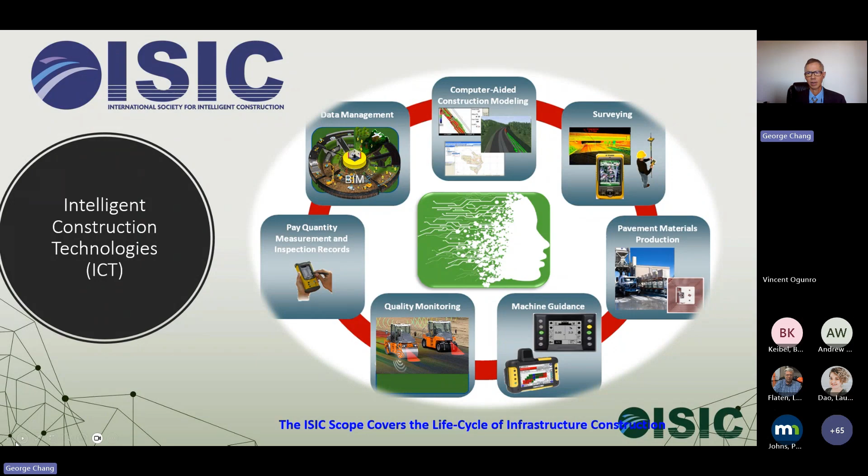So we started our inaugural conference back in 2016 in Portugal. And then we had our first conference in Minneapolis, with a lot of sponsorship from MnDOT, in 2017.

So we plan to do one international conference every other year. In 2019, we had our second conference in Beijing, China, and we postponed one year due to COVID. So in 2022, we had our third conference in Guimarães, Portugal. And this year, we have our fourth conference in Orlando, Florida.

We're going to talk about more planning in the future later on. In addition to the international conference, we also conducted supporting conferences such as the ISIC track. Normally it's a two-day track focused on intelligent construction at various conferences.

The last two we have done: in 2022, MTCNE in Minneapolis, we also had two days of the ISIC track focused on intelligent construction technology. You can see all the participants and speakers and coordinators for the 2022 ISIC track.

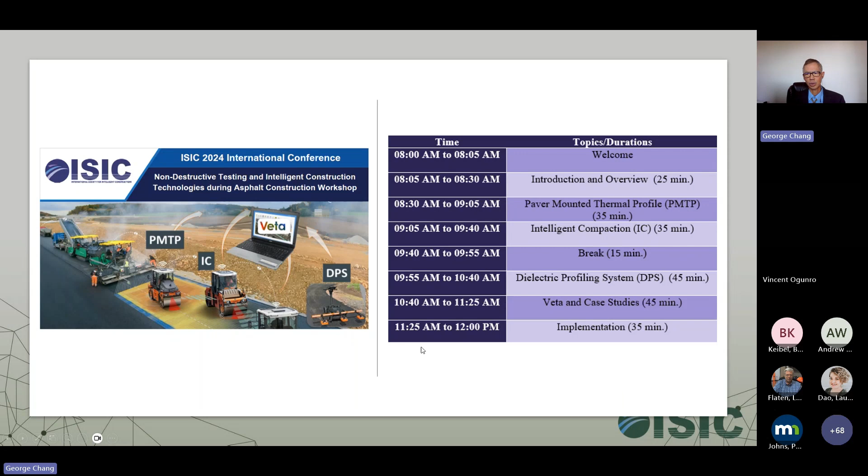You can see on the left here, PMTP, paver mounted thermal profiling, intelligent compaction, and DPS for measuring continuously the asphalt density using GPR technology, and then gluing all this technology data together using the Veta software. So this is a 4-hour workshop, really condensed to include all 4 technologies we're talking about. And not to mention, the last session of the workshop focused on implementation, which is a very crucial outcome for this workshop.

So I'm trying to pick one slide out of each session and presentation. It's going to be very hard. I'm trying to extract the 3-day conference into a 1-hour presentation. There's a lot of good content. At the end of this presentation, I'll show you how to download all the presentations from these wonderful workshops and technical sessions. So the one slide that's been brought up from the ICT workshop a lot, from the audience's feedback after the workshop, is the factors for premature pavement failure.

That was a survey by ASCE more than 12.5 years ago to find out the main causes in 2 categories for premature pavement failure. And you'd be surprised, or maybe not, to find out material failure is only 20%. The majority, 80%, is caused by workmanship. So this workshop's purpose is to use intelligent construction technology to overcome the 80% of workmanship issues that cause premature pavement failure.

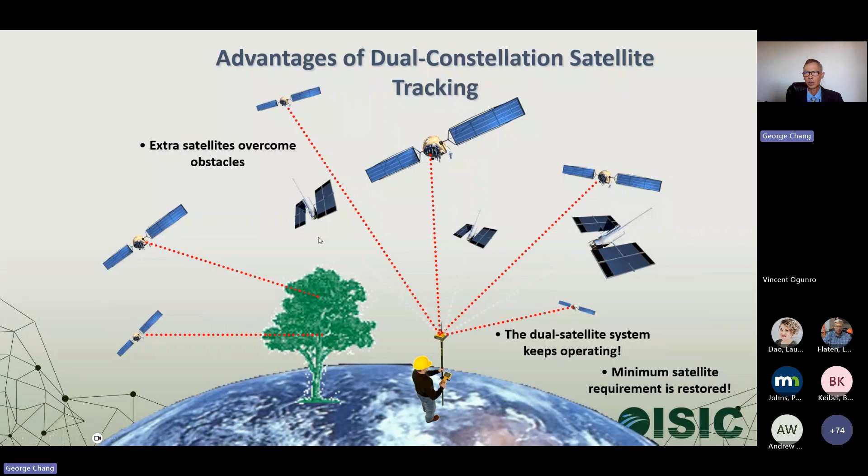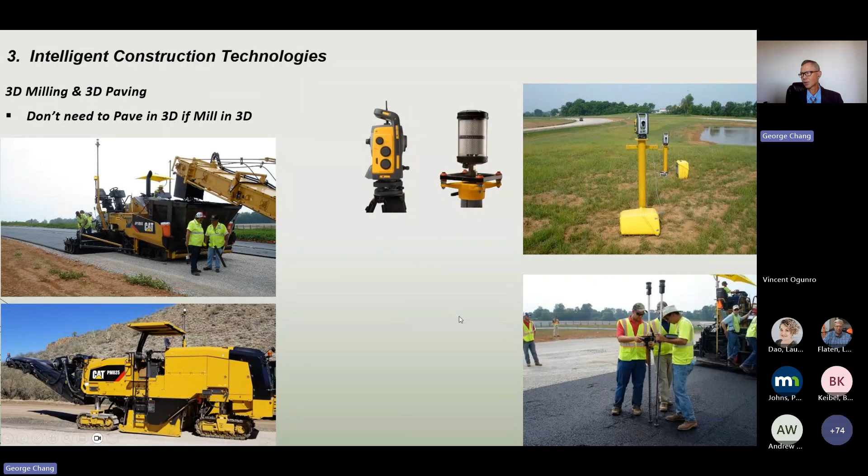Here it's showing paving work with 3D milling. If the milling uses three-dimensional control, you can pave using the paver in 2D. Here's all the positioning technology that can be combined and used by the milling machine as well as the paver to improve your paving quality. On the right-hand side, you can see the total station used to get high precision positioning, as well as a rover for a grade check after paving.

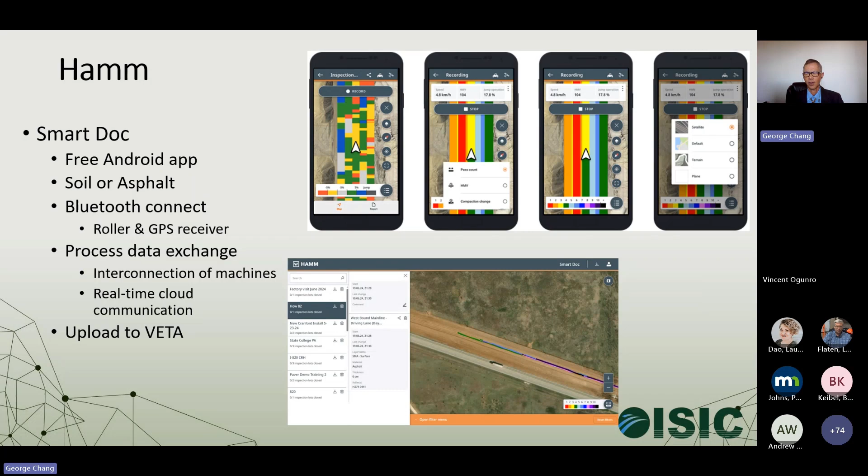Here's one slide from the compaction technology, from Tim's presentation. This is just an example to show what intelligent construction technology can do. Here it's showing the Smart Doc that can collect data from the intelligent compaction and provide information gathered from the technology, and finally you can import the data for management.

Here's one slide from EO's presentation. This is a wonderful presentation that shows the value of using GPR technology. In this case, you can see different sections with missing documentation that you can fill in using information from the GPR, so you can have more precise, accurate information for project scoping.

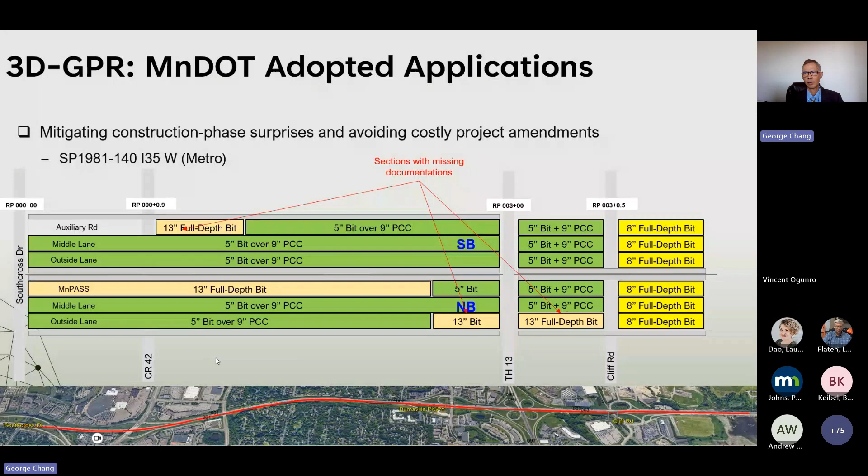It's just a wonderful application for this technology. For my last presentation, I presented the roadmap as well as the challenges and solutions for automation in construction. There's a lot of need for using this technology to overcome the shortage of skilled workers and also achieve higher quality work.

This includes mirroring the automation in autonomous vehicles, which have several levels of automation, starting with automation like controlling. I'll show some examples later, going through the intermediate step with semi-autonomy. That's one presentation in this conference, called supervised autonomy - it's a similar concept. And finally, to full autonomy technology.

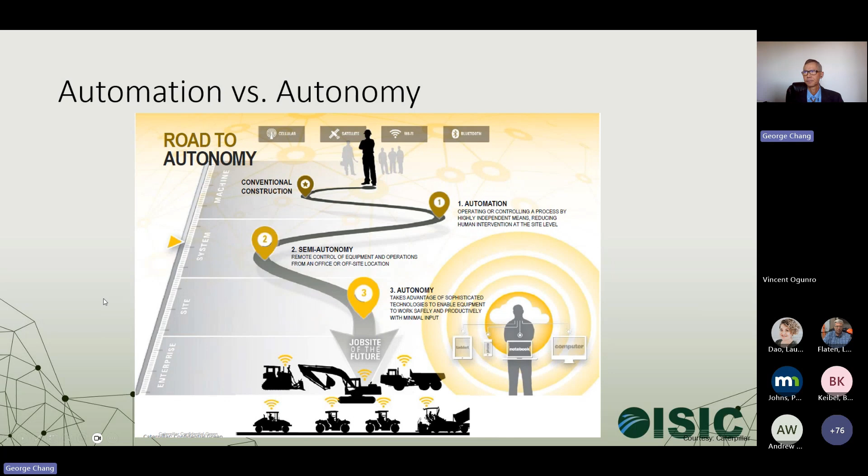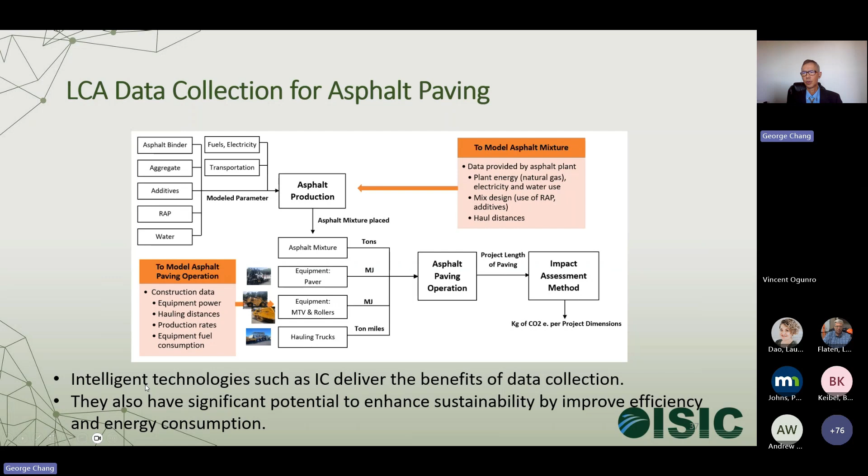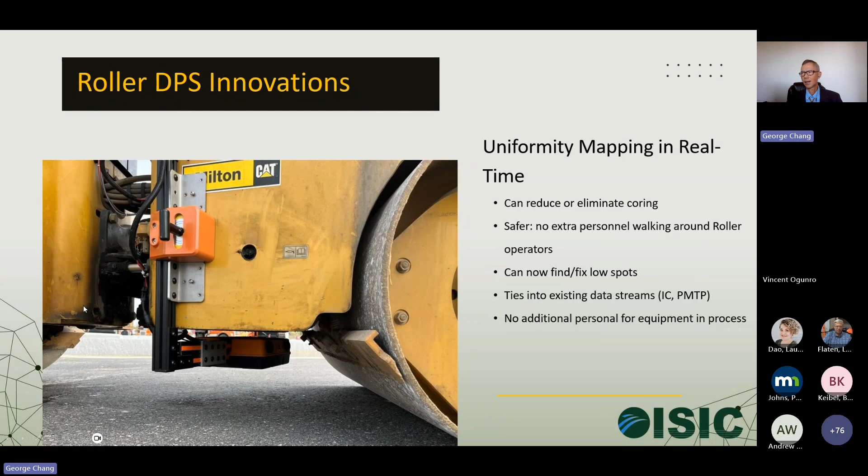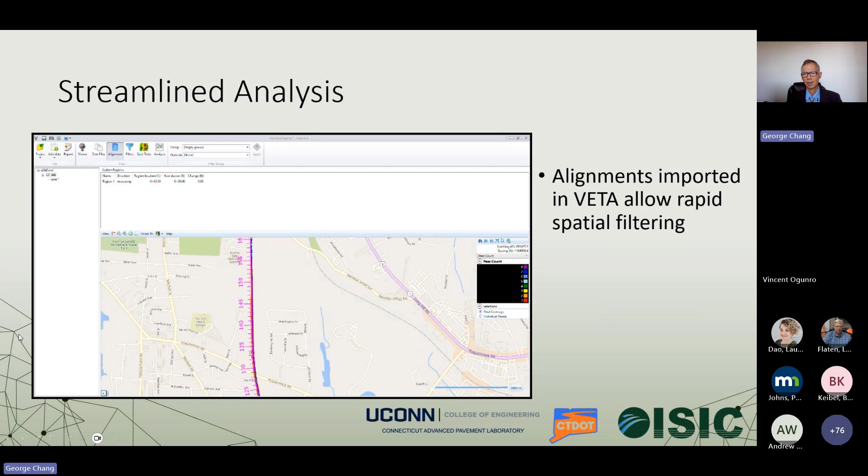Here's another wonderful presentation for PaveWise, showing all sorts of intelligent construction technology. This is one of the exciting, still in-progress efforts to mount GPR under the roller to measure asphalt density. And here's UConn's presentation using a VETA filter to better manage IC data for analysis, so it can be used in the state spec.

Here's a wonderful slide from Professor J from Australia, showing how their research really fuses and combines a lot of aspects of intelligent construction technology to make better pavement planning, design, construction, quality, and monitoring.

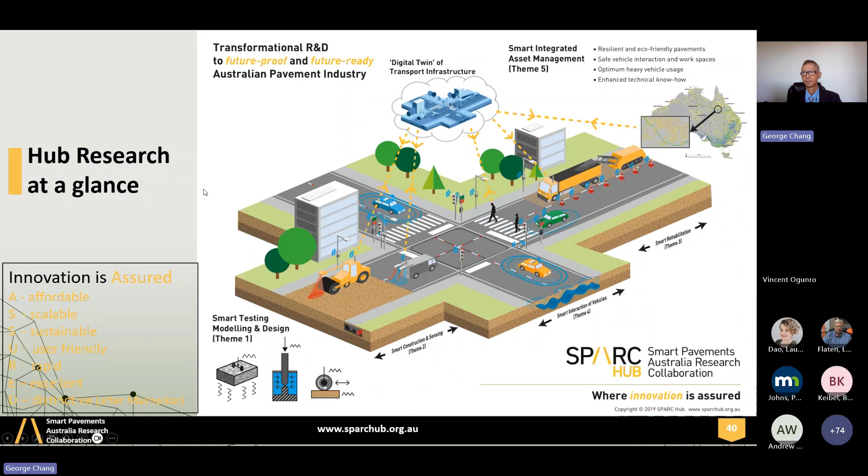Then we switch gears to digital twins, using digital construction technology as well as building information modeling. We have two sessions on that. Here we have Mary again from Federal Highway, Miguel, my friend from Portugal, as well as Ross from Trimble, as well as

a gentleman who just graduated from university, from Thailand. So we have a lot of people from all over the place. Here are the wonderful speakers for these sessions. So here's the presentation - don't get fooled by just a couple presentations. These are very solid, high quality presentations on BIM information modeling.

Miguel started with an open BIM approach for integrated design and construction, modular construction, with the illustration using the R2U project. And this can be applied to anything in all of the construction industry, including highway and so on.

And Ross from Trimble also showed the BIM model for construction and highlighted the two sides of the coin, for risk and also the benefit. You take the risk and you get the benefit.

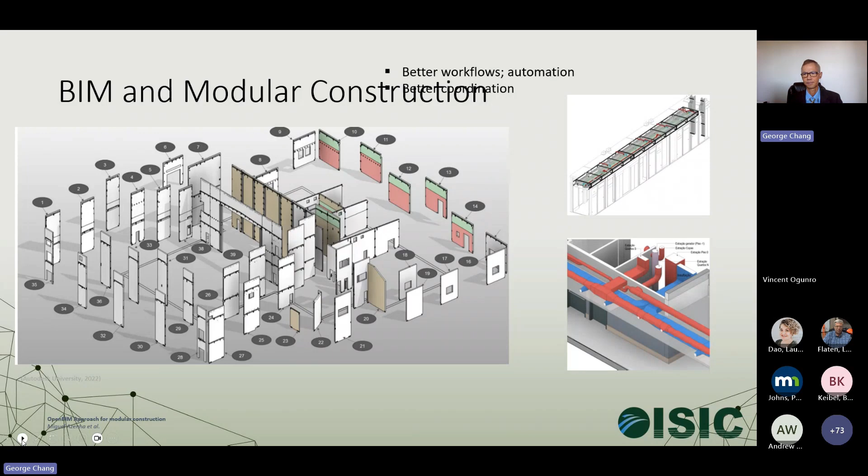We are a little bit left behind in the US, so we need to catch up. Here's one presentation example from Ross.

Presentation from Trimble for digital delivery for as-built application. Throughout the conference we've been talking about digital construction using technology that can collect the variable information as the digital as-built information that would bridge the design and the performance and management. This is the one that really can fill in the blank, linking the design with the performance, with the digital as-built data.

This is also an initiative of Federal Highway EDC to collect and manage the digital as-built data. To make it work in the real world, here's the example of Caltrans working with Granite Construction to make this happen.

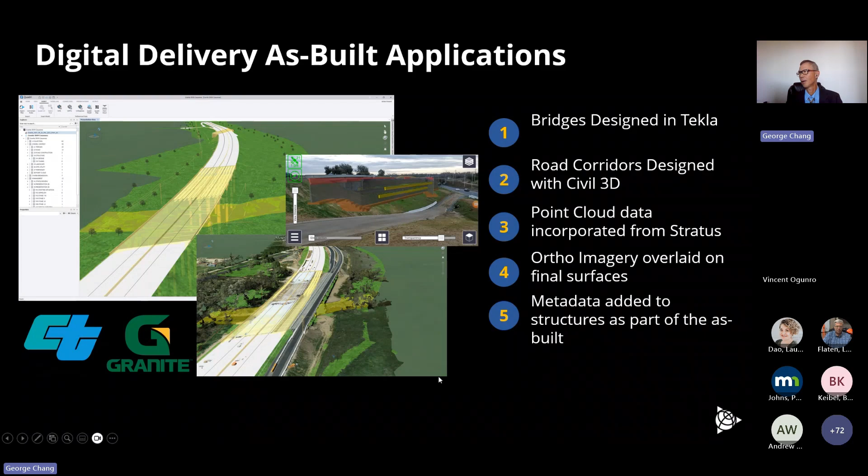Another session on quality monitoring and sustainability. Here are really heavyweight speakers from MnDOT on day 2. We had a lot of great fun during ISIC, with evening activities as well. We really need a heavy speaker to kick off the day.

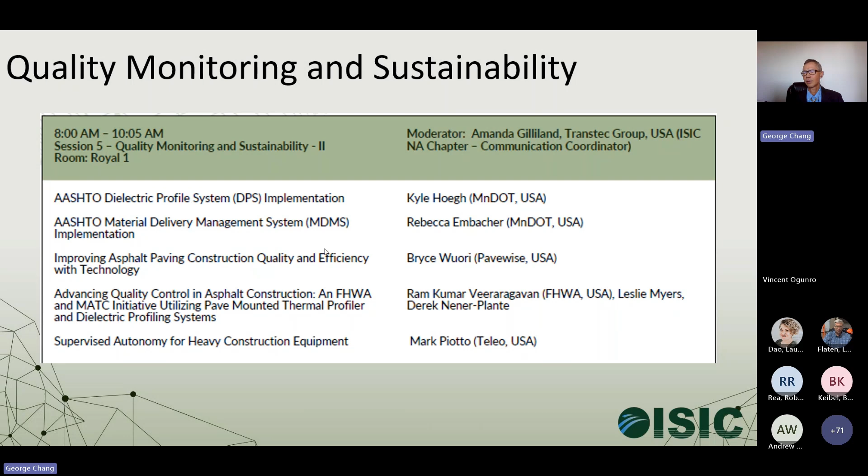We have the commitment from Kyle, Rebecca, Bryce, Ram, and Mark to kick off day 3's presentation with this wonderful presentation. Here are the presenters you're probably all familiar with.

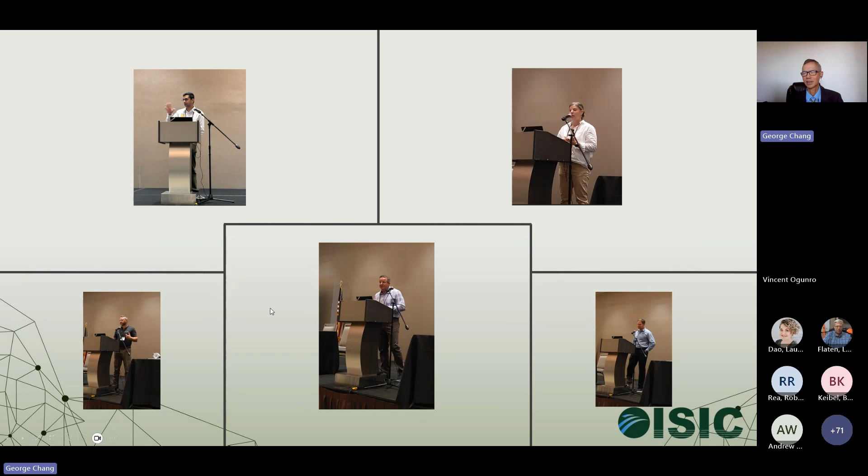You can see on the lower right here, Kyle - you can hardly see his boot, his right leg. He's really committed, after his injury, to coming to ISIC to make the presentation and participate in a lot of discussions. Here's the wonderful presentation, including Kyle's DPS pool fund study.

This shows how they can implement GPS, DPS through a lot of research effort, and also specification, working with the industry to join the effort to make DPS hopefully soon an accepted tool.

Rebecca made a great presentation on the national implementation of the AASHTO standard for the material delivery management system. That's an expanded version of e-ticketing that includes a lot of the content I'm going to show you shortly, for the whole entire life cycle of material delivery management.

That's a great presentation from Bryce again. He made three cool presentations, all very inspiring, about putting boots on the ground to make intelligent construction technology work.

Here's one presentation slide from Kyle showing the DPS National Pooled Fund Program. Again, if you have not joined this pool fund yet, call Kyle and join. It's a great pool fund study that really advances the technology and makes DPS work in the real world.

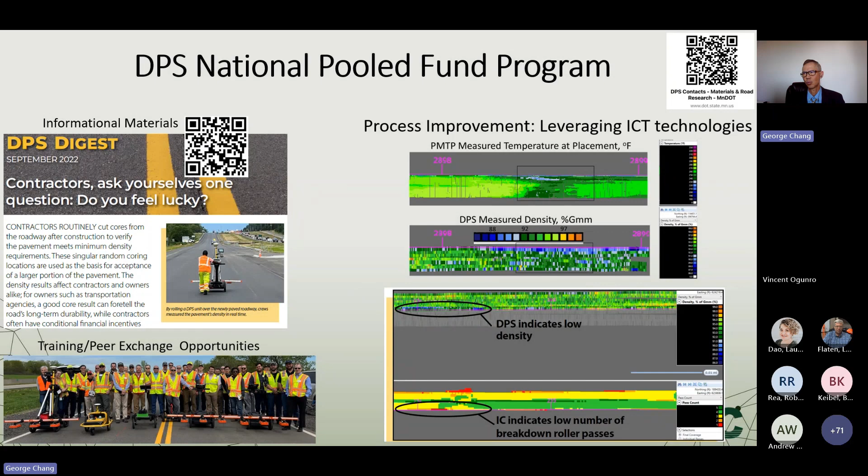Here's the presentation slide from Rebecca showing the implementation of MDMS and the joint effort implemented in Veta. Veta is a standardized intelligent construction technology platform that can currently merge with PMTP data, IC data, and DPS data, all on the same project - so you can really leverage each technology we mentioned.

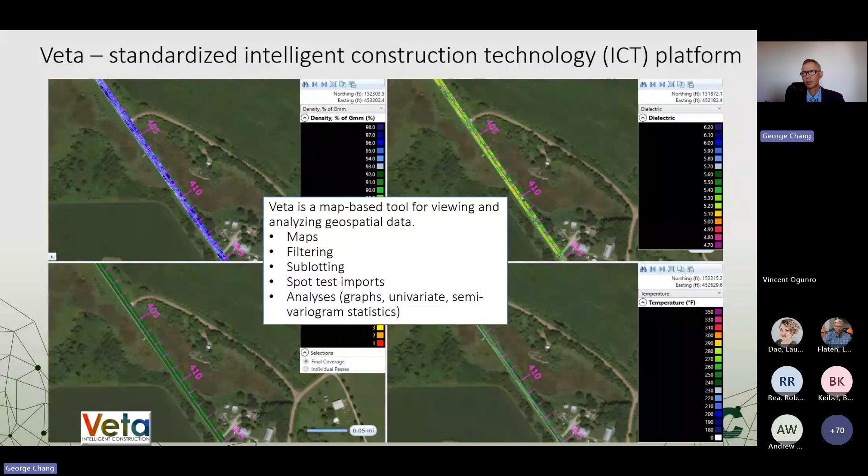With MDMS included, that's even better. You can see the development team for MDMS has been working hard to make all the different elements work together in the real world.

Here's the contractor's MDMS and also the geofences to make the material delivery management system work. That's also what our team has been working on this week.

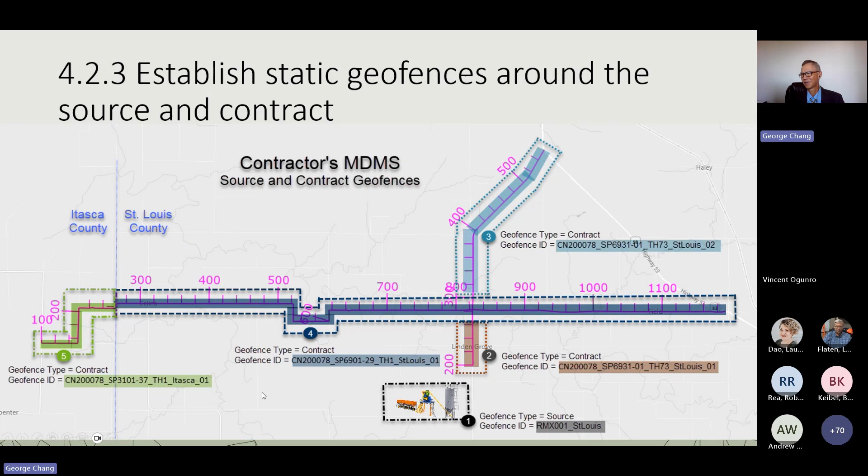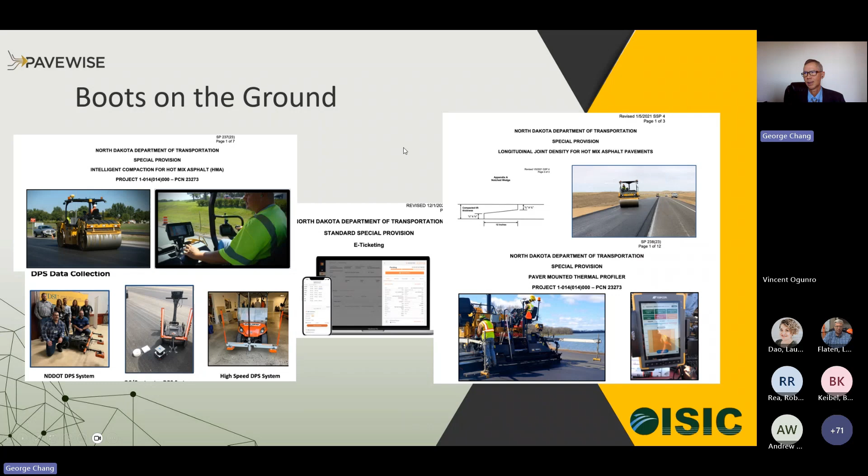Boots on the ground - that's what Bryce has always been preaching. These technologies work, that's how you make it work. It takes a lot of effort, but you just have to take the risk and work together, using the technology with the spec, working with the DOTs, to show these can really improve construction technology. You just have to do it and make it work in the field.

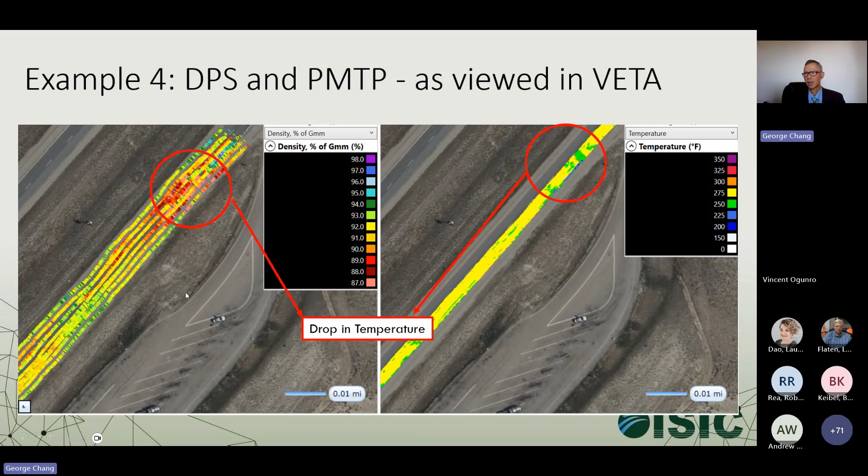Here's one of the presentation slides from Bryce that shows the drop in temperature on the right, which causes low density. This shows that PMTP data and DPS data can leverage more value if you implement both at the same time - this is what I mentioned earlier for supervised autonomy.

This is one of the great presentations from Teleo, and this is one example of so-called aftermarket solutions to work with OEM manufacturers such as Caterpillar, Volvo Group, and others to make the machine even more smart, even more intelligent. Here's the application using this technology to do so-called supervised autonomy using the remote control on the right-hand side, looking like a computer game that can remotely control the construction machine and make it work.

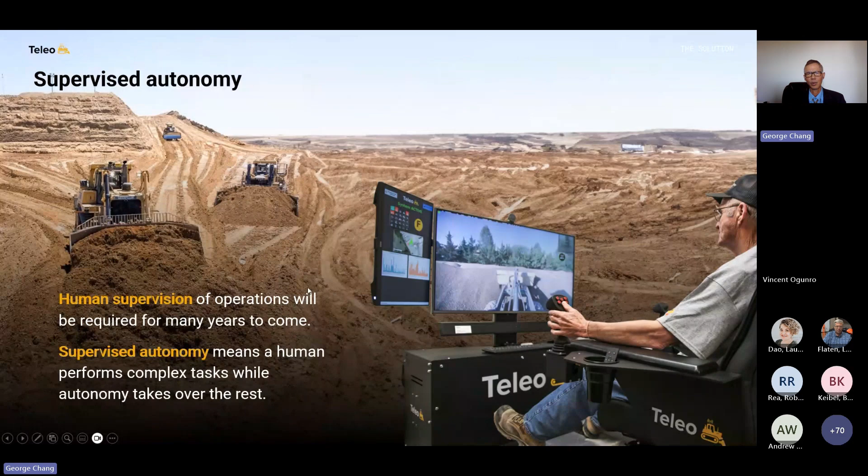This also includes semi-autonomy, with mobilization between two different job sites where the machine can drive itself to the destination, with route planning and conflict avoidance. This is a very exciting technology that we've all been talking about during the ISIC conference.

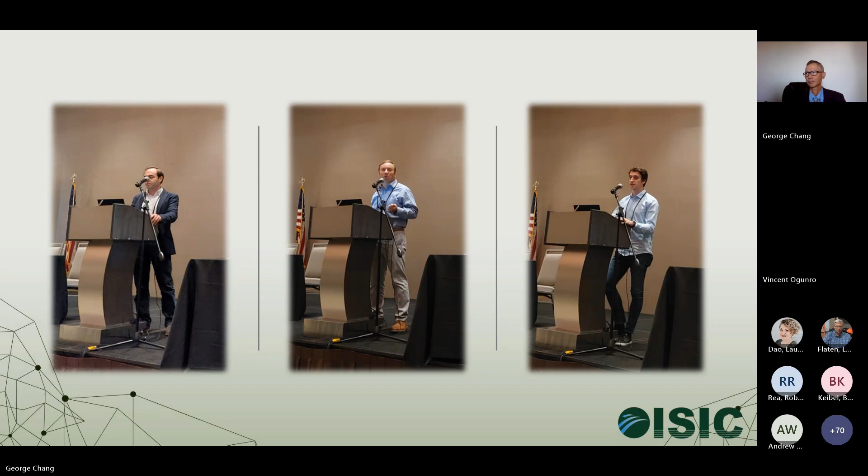Here's the presentation on the digital twin. They're all digital twins, including Eero's, because they collect digital data that can feed into the digital twin. The digital twin concept is now more broad, not only for building information modeling, but for digital construction data in general. This is a highly evolving field.

That's why we like to have this platform for all these experts to converge from all over the world to discuss the advancement, like this conference. Here's one slide from Eero's presentation.

It's called Smart Runway, one of the example projects that Eero did by embedding the sensor in the ground. They also have buried cables with a DAQ to collect the data and really make the runway smart. It can collect performance information and feed it back to the control system to make the best use of it.

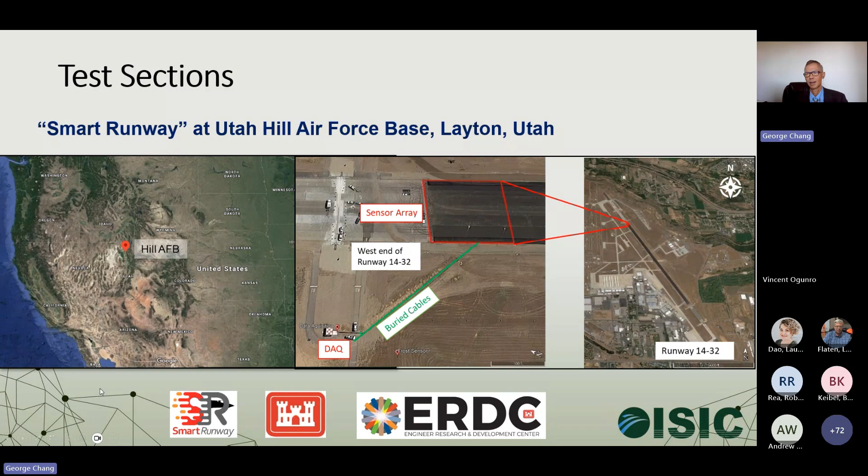There's cooperation with a lot of agencies, as you can see on the bottom here. Eero has been doing a great job making the highway, in this case the runway, smart.

So here's another session for quality monitoring and AI. Jay mentioned AI from Australia in the earlier session, and here we have Sam, also from Australia, presenting how they implement intelligent compaction in Australia.

Amanda and I have also been involved with Sam to help implement intelligent compaction in Australia since 2018. They've made huge progress by learning a lot from us in the US.

One thing I'm going to share with you from Sam's presentation answers one of the key questions from almost every person who has confronted innovative technology: what's the ROI? What's the return on investment?

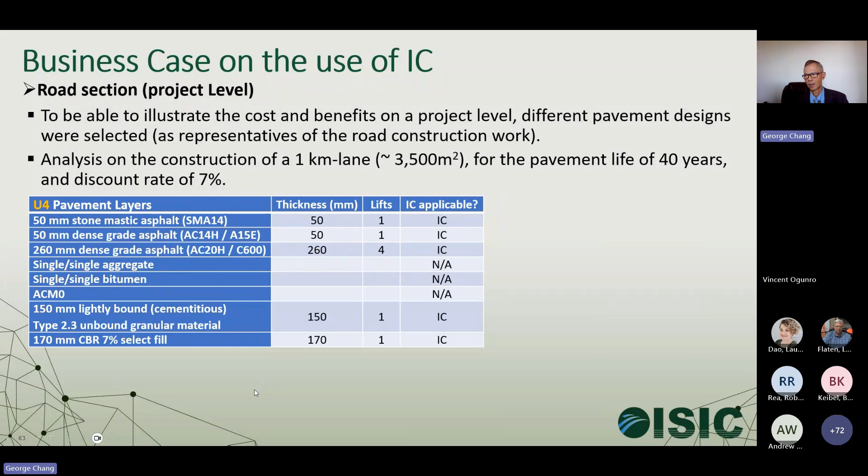Through the years it takes a lot of planning and effort, with DOT's championship to lead the industry locally, as well as working with consultants like Transtec in a joint effort to make this work year after year through the learning curve and on.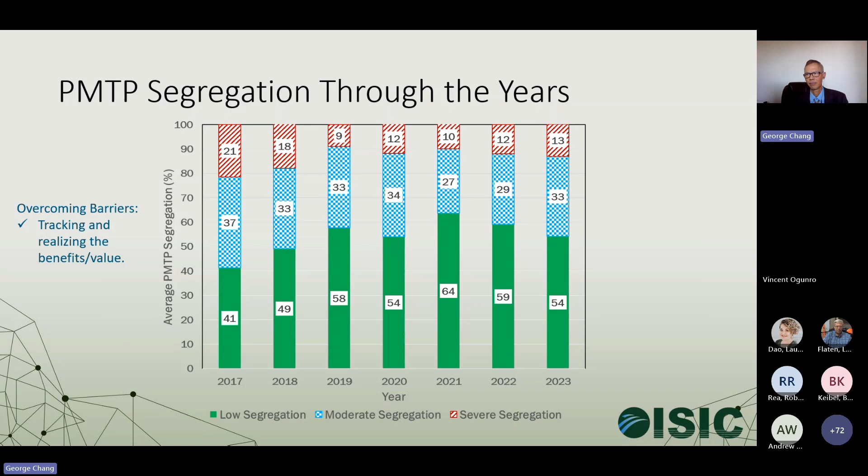And this showed the benefit and result. You've got to have accountability for doing those efforts through years of investment. So this is one example from Amanda's presentation.

At some stage for implementing those technologies, when agencies elect to use the data from the technology for a pay item, such as incentive, a very important step needs to be done to comply with, say, the Federal Highway CFR code.

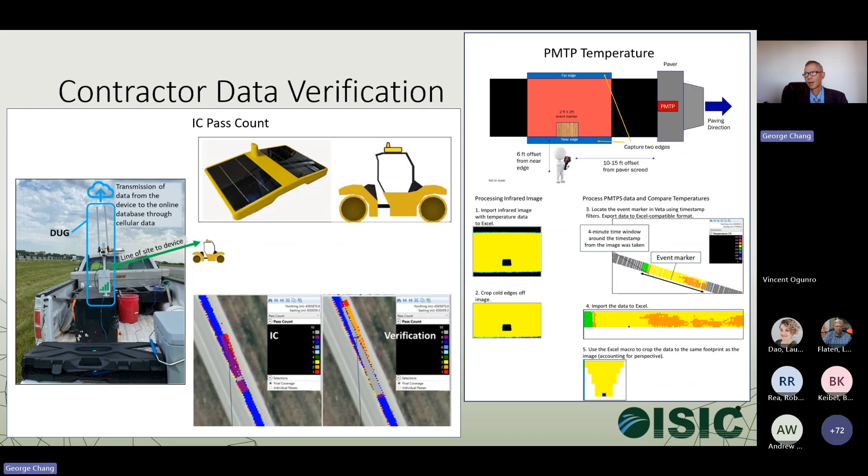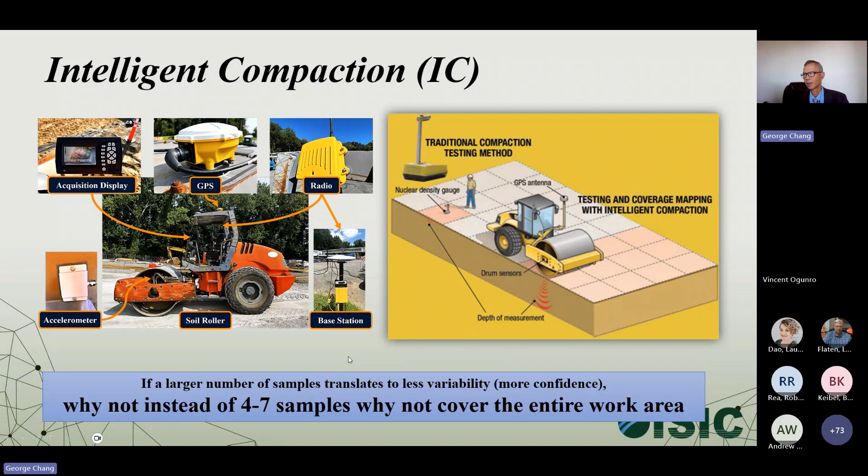Here's another example of using intelligent construction technology. In this case, intelligent compaction technology can really work with machine learning and leverage the recent boom of artificial intelligence. I guess you're probably using ChatGPT or Copilot on a daily basis.

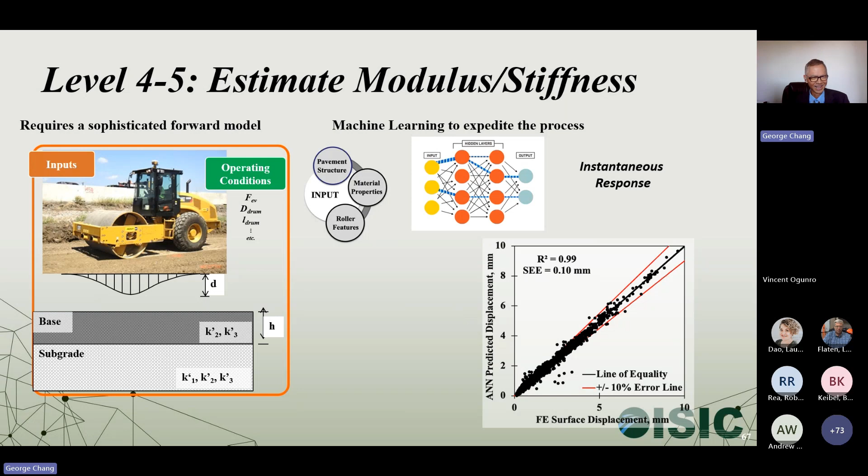Holy grail of measurement compaction metrics such as modulus and density. And this will answer the prayer for DPAC, as we discussed during the ISIC conference.

In this case, we use an open panel discussion to really gather up all the thought, discussion, questions, and solutions from the past 3 days of conference. We have recorded and have a great transcript. I'm going to show some examples. If you missed this open panel discussion, we highly recommend you download the summary report and see what was discussed.

That includes the wonderful open panel members from our executive committee at ISIC, Professor Sohail Nazarian, and also Dr. Tom Yu, our keynote speaker from Federal Highway, and Rebecca from MnDOT. We also had contractors from Ajax and Fulton Hogan from New Zealand, and manufacturers from Kowalski, Paul from MOBA, and Andrew Lindsay from Trackit for this open panel discussion.

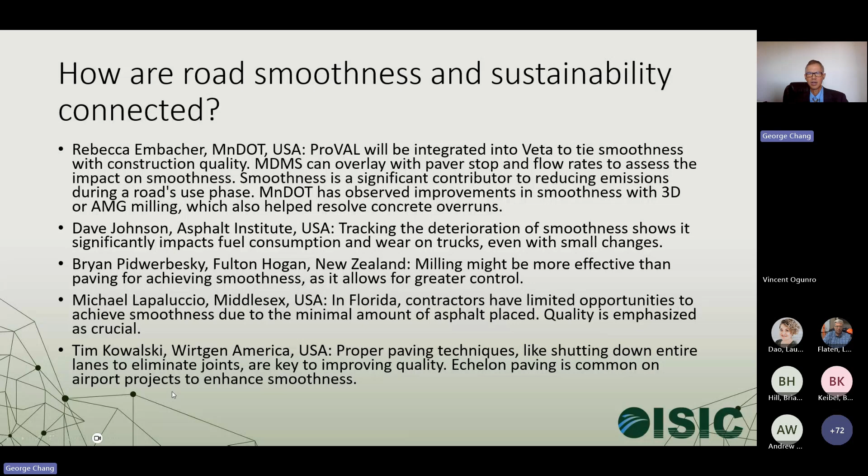So this is just one great discussion from agency, from institute, and from Bryan from New Zealand, who really injected his two cents on how this can work. And most importantly, how contractors really make it work, and manufacturers respond to the needs for industry and agency to make it work. So again, the summary report can be downloaded from our website.

The link is underneath here. We can always go to our website, www.is - don't forget the dash - ic.org. On the front page, you can see an image like this for the summary report for ISIC 2024. You can download the entire content.

As I mentioned, the final few pages of the summary report have all the download links for the presentations we just mentioned. It's highly recommended for you to download those presentations, as all the speakers graciously agreed to share them.